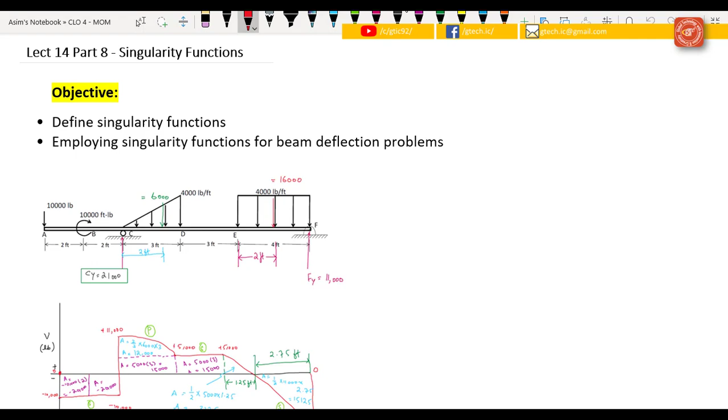In this video lecture, we start discussing the topic of singularity functions. The outcome of this lecture is how we can define the singularity function and how we apply the singularity functions for calculation of beam deflection problems.

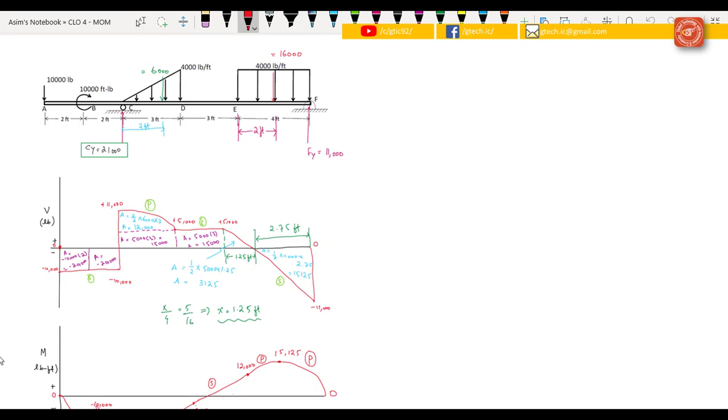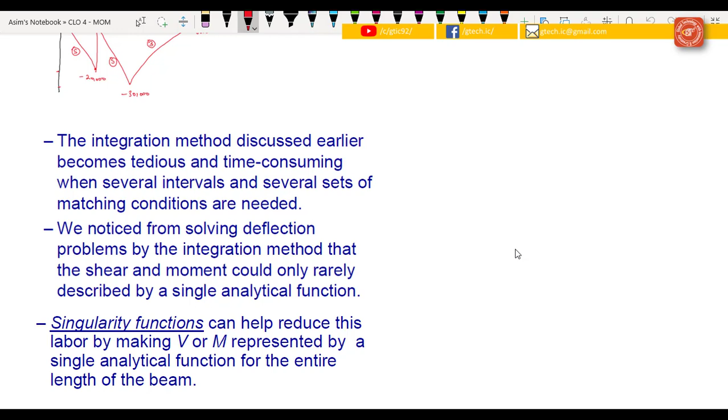So as we noticed, solving the deflection problem using the integration method, the shear and moment could only rarely be described by a single analytical function. For every section cut you have to calculate the moment separately.

So the singularity function basically helps to reduce this labor and extensive work by making the V and M, shear force and bending moment, represented by a single analytical function for the entire length of the beam.

And we can define the singularity function as an expression for x written as x minus x naught, raised to the power n, where n belongs to the integers that can be positive or negative including 0, and x naught is a constant equal to the value of x at the initial boundary of a specific interval along the beam.

So if the value of x is less than x naught, then the value of the singularity function would be 0. If the value of x is greater than or equal to x naught and n is equal to 0, then the value of the singularity function would be 1. Similarly, if x is greater than or equal to x naught and n is not equal to 0, then the value of the singularity function would be x minus x naught raised to the power n.

And we can derive and integrate the singularity function in this form. Okay, so now let's start.

We have a simply supported beam with different reactions, and a point load, UDL (uniformly distributed load), and moment applied at different sections of the beam, indicated at A, B, C and D. The length of the beam is L.

The reaction force acting here is AY, and the reaction force acting here due to the roller support is DY. The distance from A to B is x1, the distance from A to C is x2, and the distance from A to this point would be x3.

And we take this moment as positive. So now let's first draw the section cut here between A and B. Then the moment would be AY times the distance of the section cut, that is x, so AY times x. In this case, x is greater than 0 but less than x1.

Now make a section cut between B and C. Then the moment at this point would be AY times x plus MB, and in this case x is greater than x1 and less than x2.

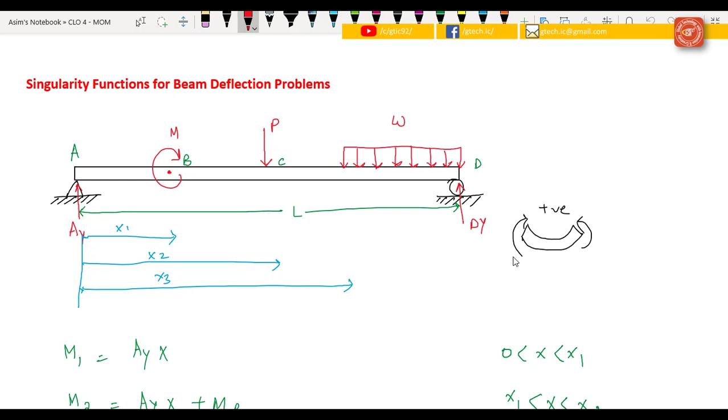Now apply the section cut here between C and D. Then the moment is AY times x plus MB minus this point load, which is moving in the anti-clockwise direction so it would be negative, times the distance from C to this cut, which would be x minus x2. As we know the total distance from A to the section cut is x, and the distance from A to this point is x2, so to find the distance from C to the section cut, the result would be x minus x2. In this case x is greater than x2 and less than x3.

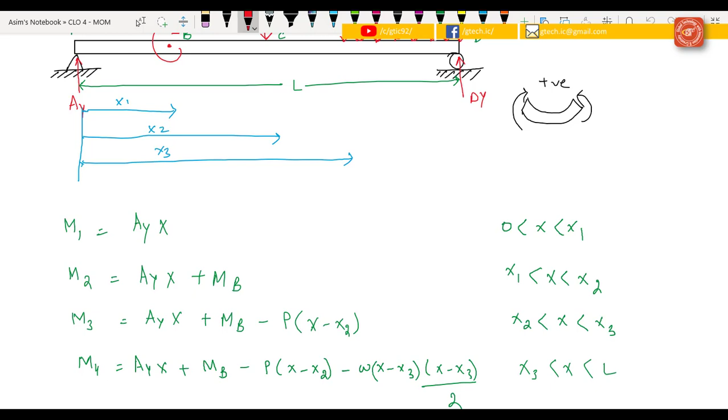Now apply the section cut here between C and D, then the moment equation would be AY times x plus MB minus P times (x minus x2) minus the UDL load, that is W, acting here as a resultant force, taken at its half, so (x minus x3) times (x minus x3) over 2.

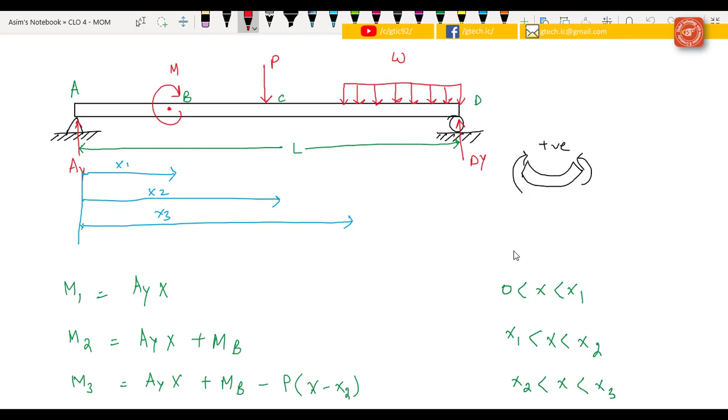In this case x is greater than x3 but less than or equal to L, so that's why the reaction force Dy, that is acting upon here, would be 0, so we didn't consider it.

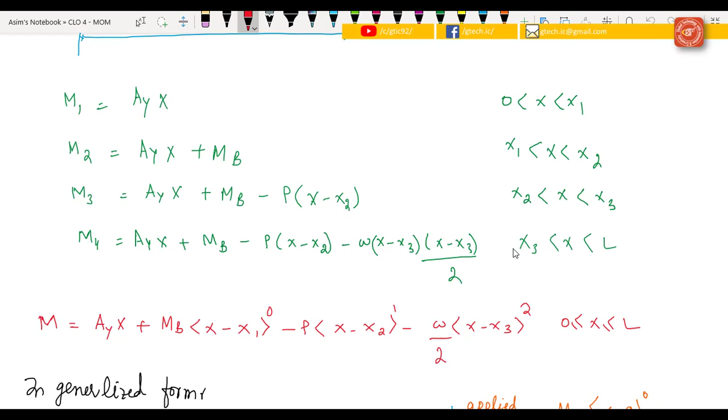So we can now represent all this into a singular function known as a singularity function. That would be shown here: moment equals Ay x plus moment at point B, then the singularity function x minus x1 raised to power 0, minus P times singularity function x minus x2 raised to power 1, again minus W by 2 times x minus x3 squared, where x is greater than or equal to 0 and less than or equal to L. So this single equation would represent the whole loading condition of the beam.

Now let's use this result to generalize the singularity function terms. F will represent the magnitude of the load, x load represents where the load is applied, and n is the integer which describes the load. As far as the moment, like we had here at M sub B, the magnitude of load we will just call generically M sub A.

In this case it was M sub B, but generically we write it as M sub A, and it was applied at point A, which in this case was x1, raised to the power 0, divided by 0 factorial, which is 1.

Then for the point load, we have the magnitude of the point load which would be generically written as P sub b times x minus b raised to power 1, and the factorial of 1 would be 1, and it is represented here as x2.

Then we have a distributed load. For distributed load we have W, the magnitude of the load, times x minus c in the singularity function, where C is where the distributed load starts being applied, which is x3 in this example, and then we have that squared, divided by 2 factorial, which is equal to 2.

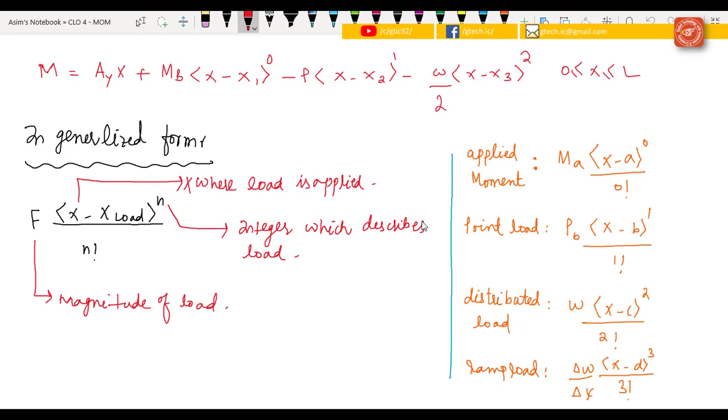So for a distributed load that stops before the end of the beam, we use superposition of these different types of load. Let's look at an example where the distributed load, or our ramp load, or whatever the load, stops before the end of the beam. Here we have the situation shown here.

As we go along, when we reach x1, we have a ramp load, so we are going to use this form. This is going to be the negative moment, the delta W, the change in load over the change in x, times x minus x1 cubed over 3 factorial. But that term is going to give us a ramp that goes all the way to the end of the beam, but we only want a ramp load that goes up to x2.

So we are going to have to use superposition and subtract out this portion, the dashed portion. Let's start by subtracting out, and in this case it would now be a positive moment, a ramp that starts at x2 to the end of the beam.

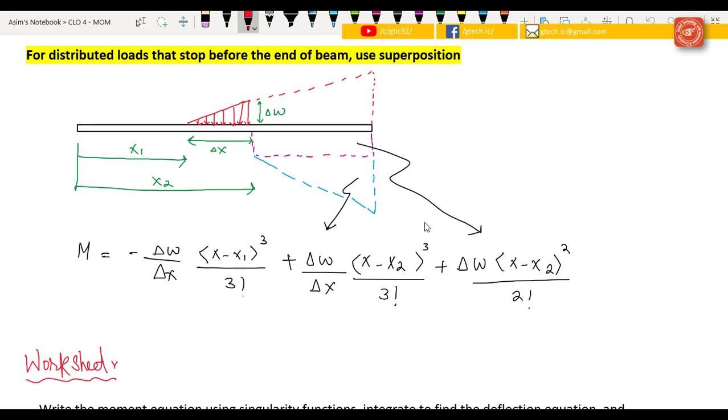And so that's the way we can solve and write a moment equation for a very complicated beam loading situation in a single function.

Now let's move to the worksheet. Here the question is we have to write the moment equation using the singularity function, then integrate to find the deflection equation, and determine the deflection at the free end for the beam shown below, made of steel with modulus of elasticity E equal to 200 gigapascal, and an area moment of inertia for the cross section I equal to 130 times 10 raised to power 6 millimeter to the 4th.

So where do we start from? Pause the video and try to solve it on your own.

Okay, hopefully you come up with a very good solution. So here is the solution.

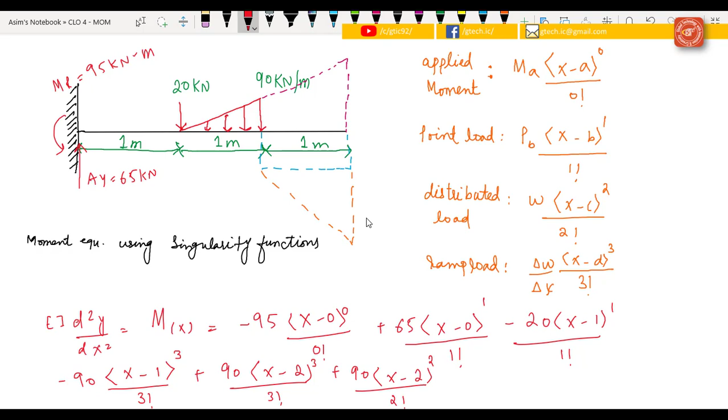EI times slope is equal to minus 95 x raised to power 1 over 1 factorial plus 65 x raised to power 2 over 2 factorial minus 20 x minus 1 raised to the power 2 over 2 factorial minus 90 x minus 1 raised to the power 4 over 4 factorial plus 90 x minus 2 raised to the power 4 over 4 factorial plus 90 x minus 2 raised to the power 3 over 3 factorial, and then constant C1.

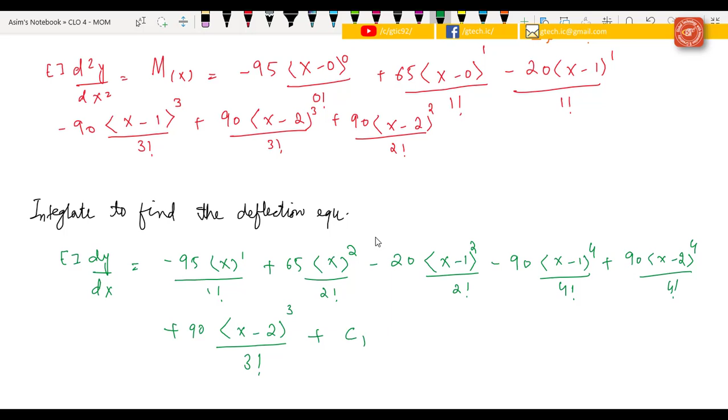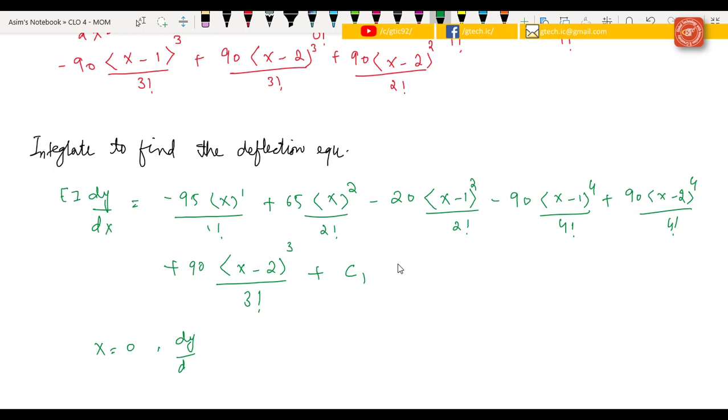So now substitute all these terms into this equation, then you come up with this value, that is C1 is equal to 0. When you substitute x equal to 0, all these terms factor out and go away, giving C1 equal to 0. Now integrate this equation again to find the deflection.

So EI y is equal to minus 95 x squared over 2 factorial plus 65 x cube over 3 factorial minus 20 x minus 1 raised to the power 3 over 3 factorial minus 90 x minus 1 raised to the power 5 over 5 factorial plus 90 x minus 2 raised to the power 5 over 5 factorial plus 90 x minus 2 raised to the power 4 over 4 factorial plus C2, that is the constant.

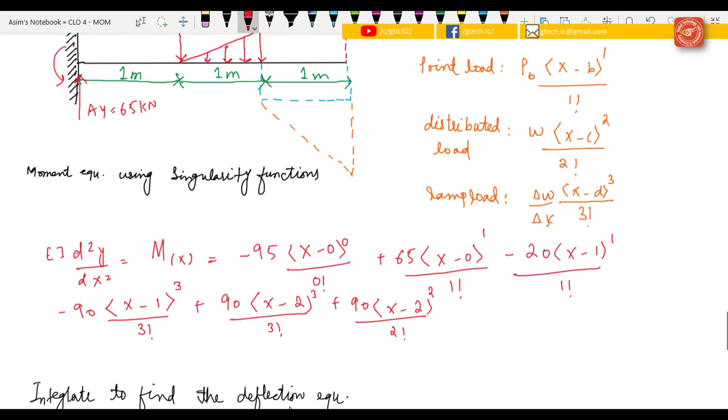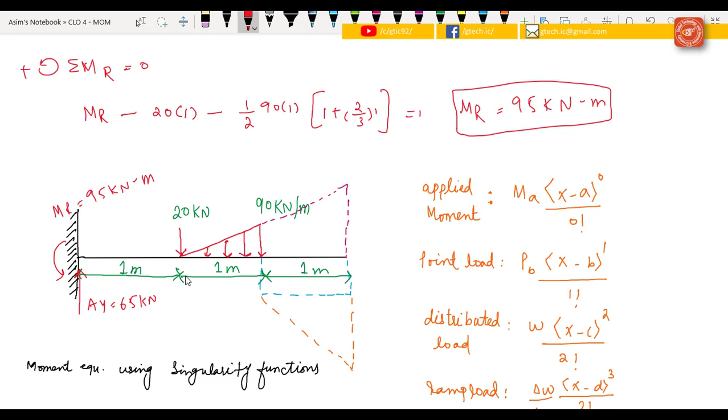Now again substitute the boundary condition at x equal to 0, the deflection is 0. We can clearly see that when x is 0, the deflection is 0 and the slope is also 0. When x is 3, the deflection and slope are maximum. So substituting this condition, all these terms factor out and go away, and the answer is C2 is equal to 0.

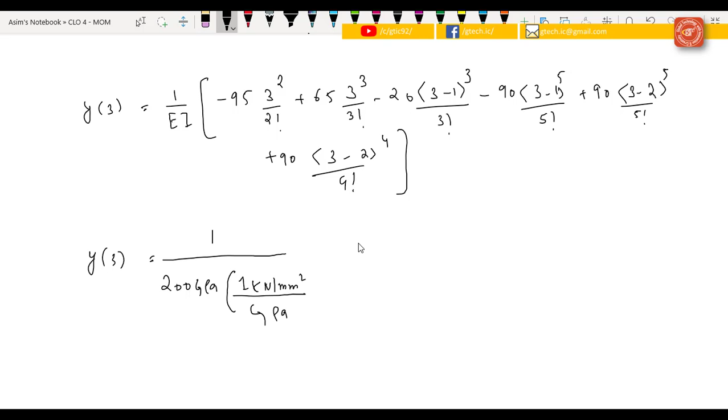And after solving these terms the values would be -427.5 plus 292.5 minus 26.67 minus 24 plus 0.75 plus 3.75.

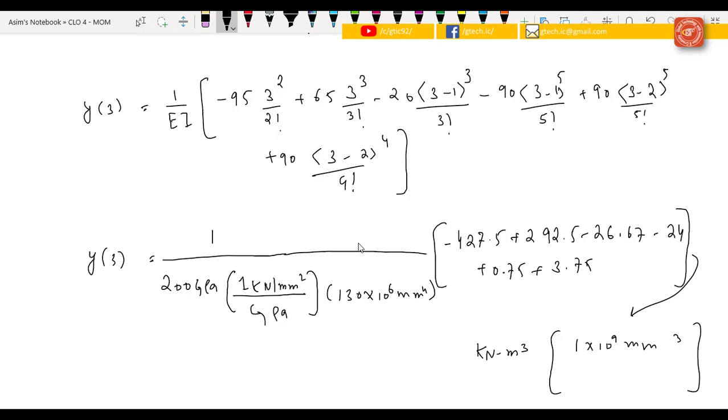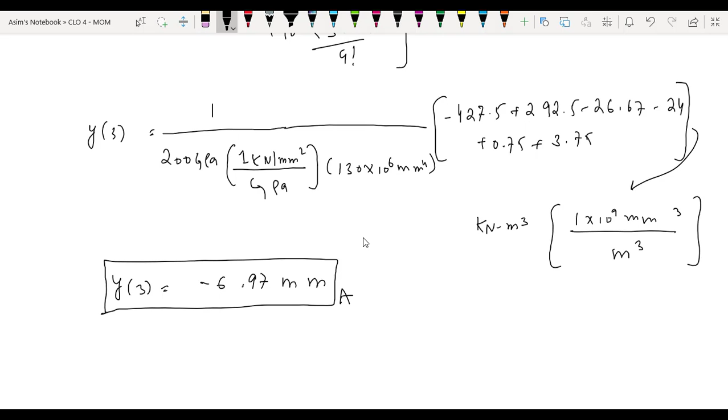Okay, now when you solve this, you get the answer: -6.97 millimeter. That would be the required answer. Thank you.